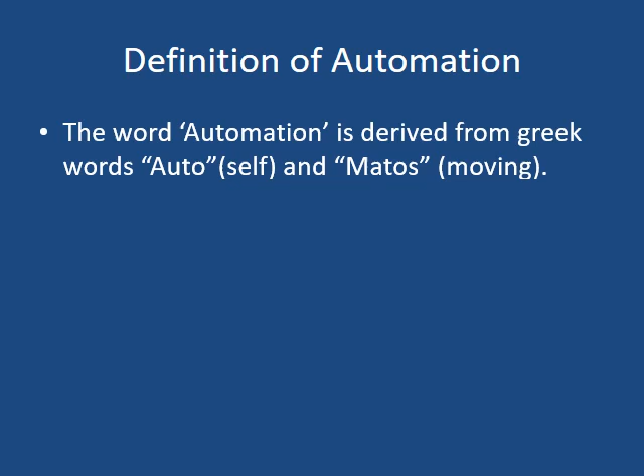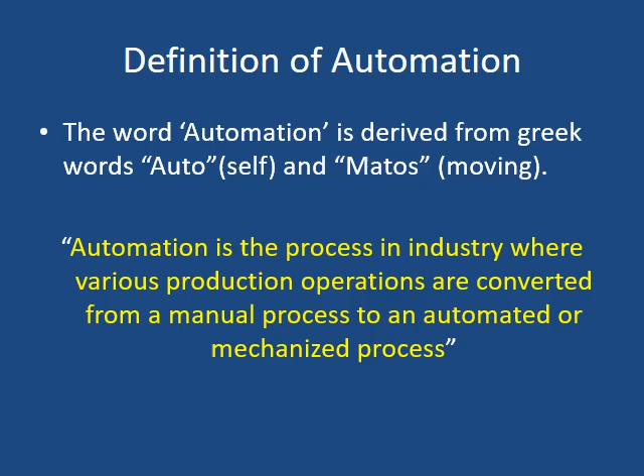So what is automation? The word automation is derived from the Greek word 'auto' meaning self and 'matos' meaning moving. Therefore, automation is a mechanism that moves by itself. The definition of automation is the process in industry where various production operations are converted from a manual process to an automated or mechanized one.

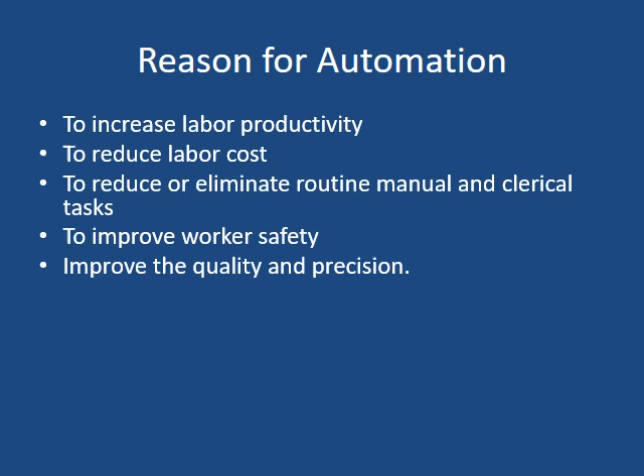Now, why automation? To increase labor productivity, to reduce labor cost, to reduce or eliminate routine manual and clerical tasks, to improve worker safety, improve quality and precision, to do jobs for which human beings will not have the capacity, optimization of investment, higher profitability, and reduced time.

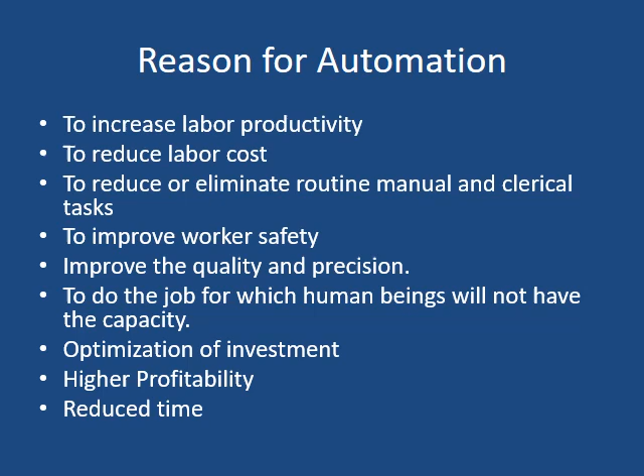Now let us discuss how many types of automation there are. There are four types: fixed automation, programmable automation, flexible automation, and finally integrated automation.

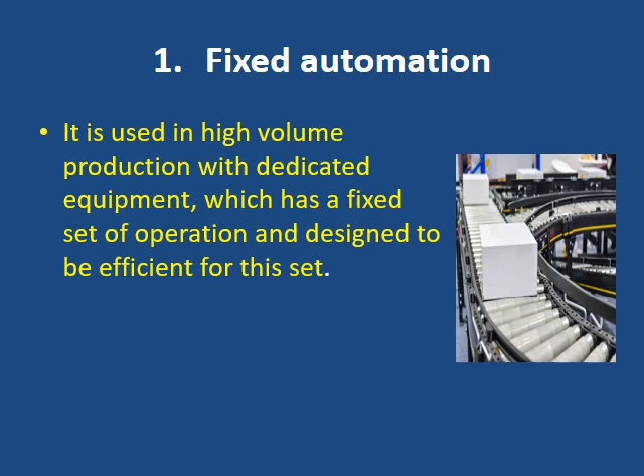The first one, fixed automation, is used in high volume production with dedicated equipment which has a fixed set of operations and is designed to be efficient for this set. Examples include distillation processes, conveyors, paint shops, transfer lines, etc. In the diagram, we can see how a conveyor transfers goods in a fixed automation system.

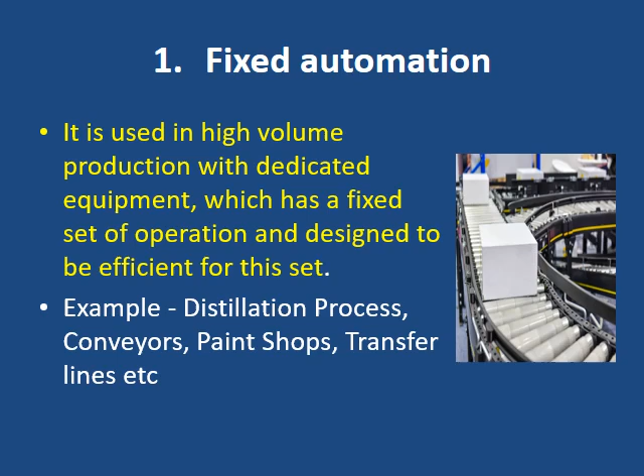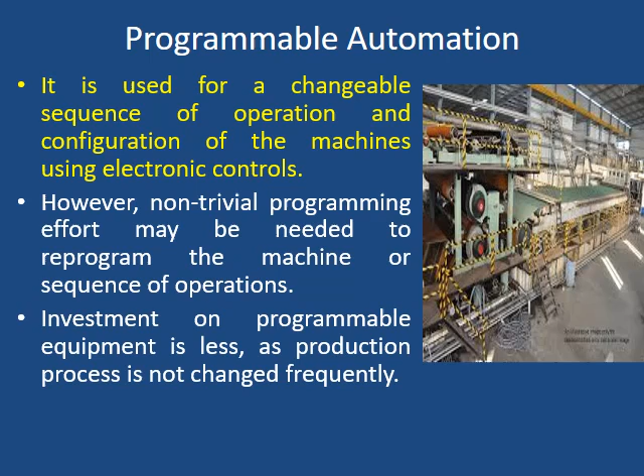Now the second, programmable automation. It is used for a changeable sequence of operation and configuration of machines using electronic controls. However, non-trivial programming effort may be needed to reprogram the machine or sequence of operation. Investment on programmable equipment is less as the production process is not changed frequently. It is used in steel rolling mills and paper mills, etc. In the figure, it shows a paper mill running under programmable automation.

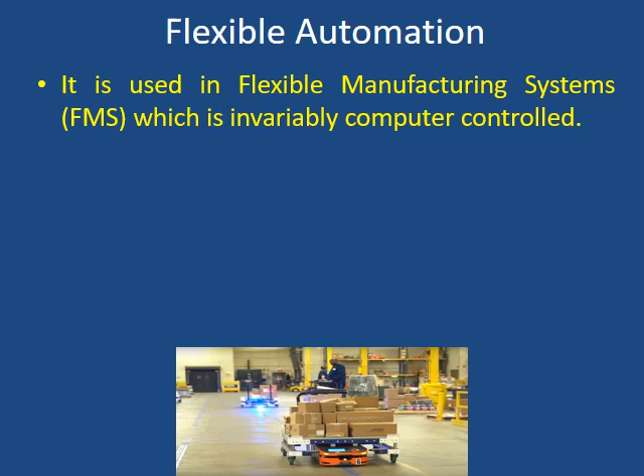The third one, flexible automation, is used in flexible manufacturing systems which are invariably controlled by computer. Human operators give high-level commands in the form of codes entered into the computer, identifying products and their location in the sequence, and lower-level changes are done automatically.

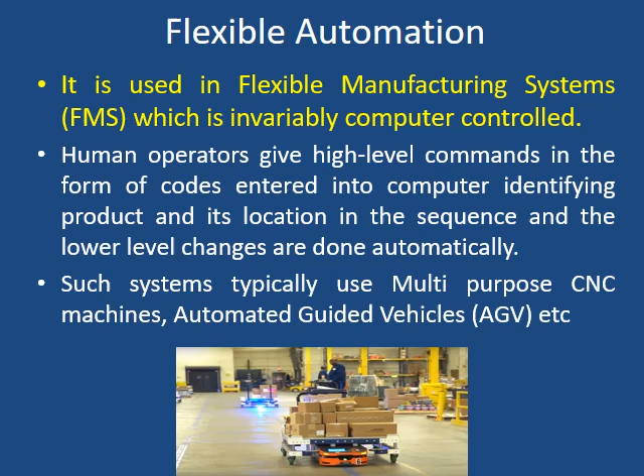Such systems typically use multi-purpose CNC machines, automated guided vehicles, etc. In the figure you can see an automated guided vehicle which is loading goods and transferring them without the help of a human. The next and final one is integrated automation.

It denotes complete automation of a manufacturing plant with all process functioning under computer control and under coordination through digital information processing. It includes technologies such as computer-aided design and manufacturing, computer numerical control and machine tools, flexible machining systems, automated storage and retrieval systems, automated material handling systems such as robots, automated cranes and conveyors, and computerized scheduling and production.

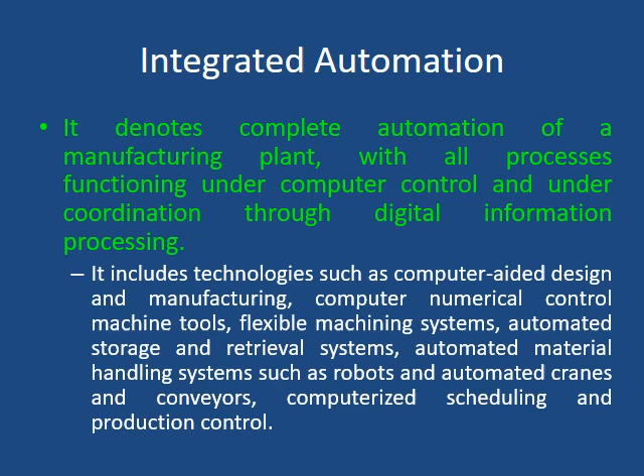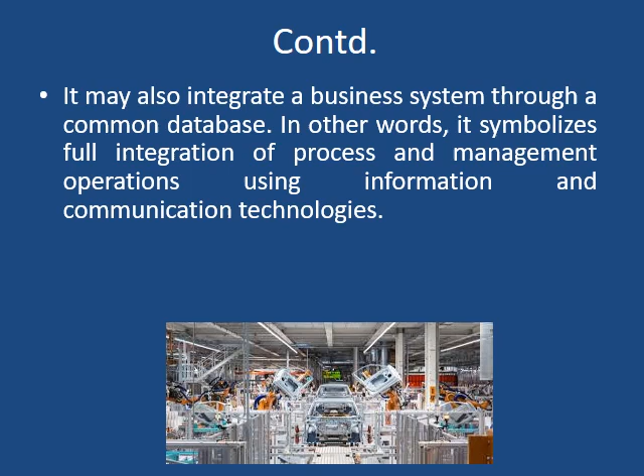It may also integrate a business system through a common database. In other words, it symbolizes full integration of process and management operations using information and communication technologies. Typical examples of such technologies are seen in advanced process automation systems and CIM, computer integrated manufacturing processes. Now, in the figure you can see a complete integrated automated system.

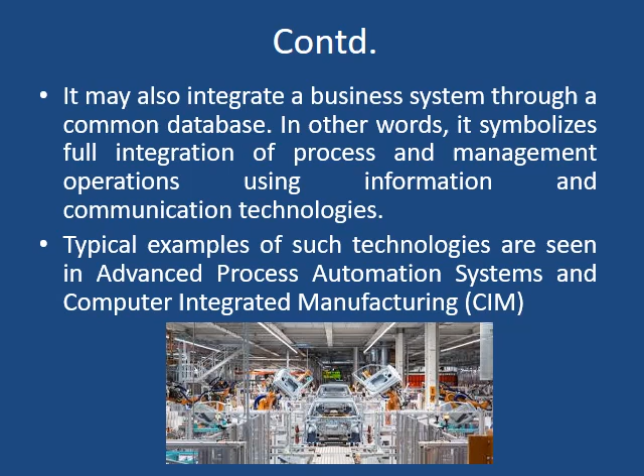So these are the types of industrial automation. Now we can see how robotics are used in industries.

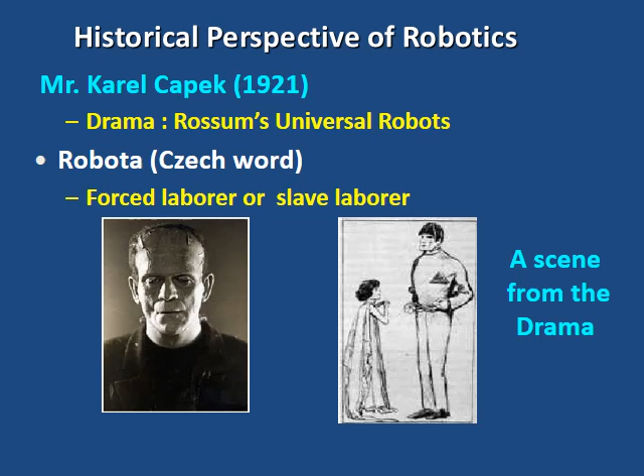The word robot comes from a drama. The word robot was first used in 1921 by Czech playwright Karel Čapek in his play Rossum's Universal Robots. The play involves a factory that builds artificial people to be servants for humans. In this slide, you can see Karel Čapek and a scene from the drama.

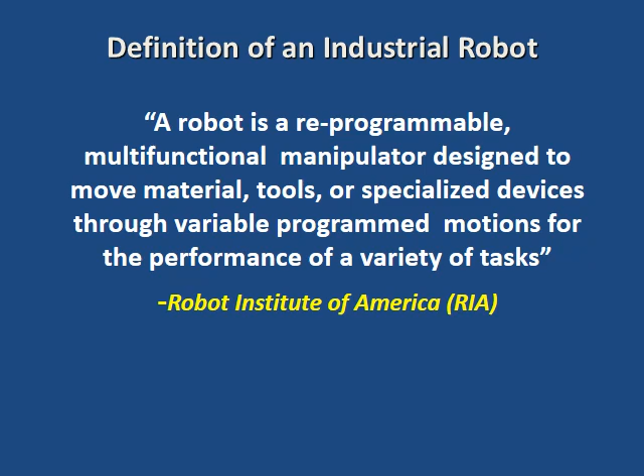Now, what is a robot? A robot is a reprogrammable, multifunctional manipulator designed to move materials, tools, or specialized devices through variable programmed motions for the performance of a variety of tasks.

Now, what are the different laws in robotics? It includes three laws. The first law states that a robot may not injure a human being or, through inaction, allow a human being to come to harm. The second law states that a robot must obey the orders given by human beings, except where such orders would conflict with the first law.

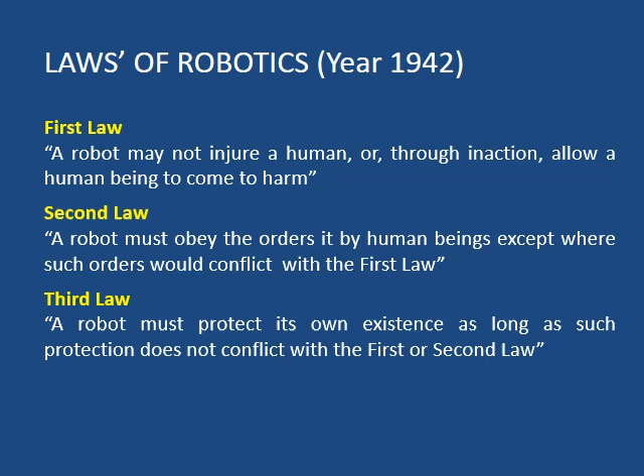The third law states that a robot must protect its own existence as long as such protection does not conflict with the first or second law. And finally the last one, the fourth generation robot.

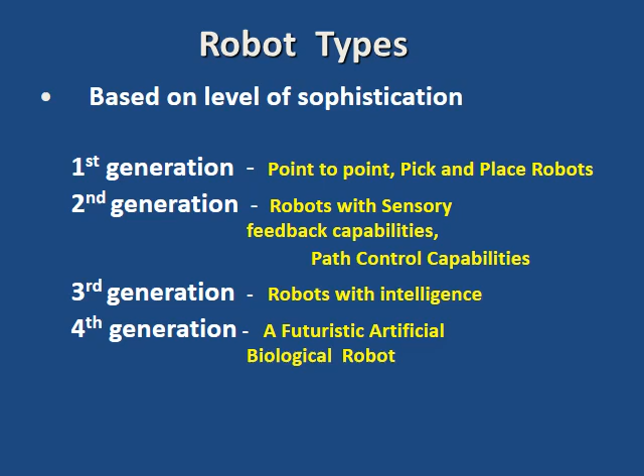It is a futuristic artificial biological robot. It is an interdisciplinary science that combines the fields of biomedical engineering, cybernetics, and robotics to develop new technology that integrates biology with mechanical systems, to develop more efficient communication, alter genetic information, and create machines that imitate biological systems. Now let's discuss the configuration of different robots used in industries.

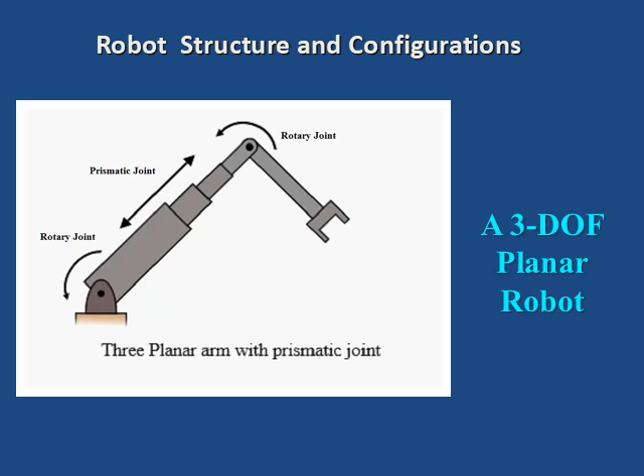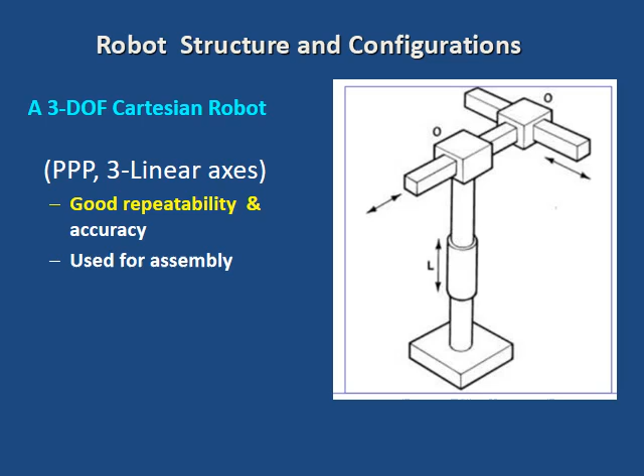Starting with a planar robot, which has 3 degrees of freedom: 2 rotary joints and 1 prismatic joint. The second one is a Cartesian robot, which contains 3 degrees of freedom. It has 3 linear axis movements and also has good repeatability and accuracy, and it is used for assembling.

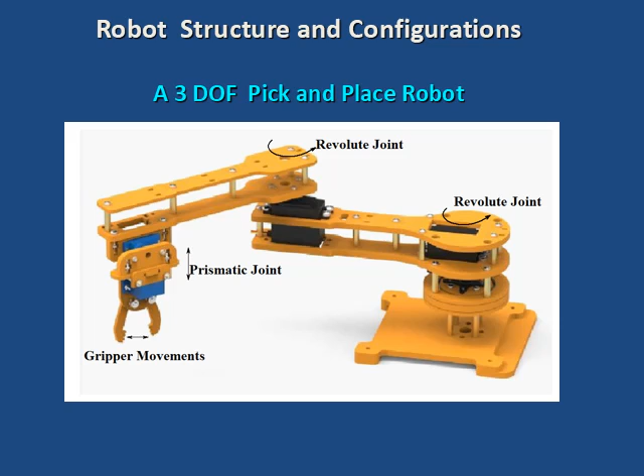In this slide, you can see a 3 degrees of freedom robot which can pick and place things, so it is a pick and place robot. And this is a 3 degrees of freedom spherical robot which has 2 rotary motions and 1 linear axis, and its work envelope is a portion of a sphere.

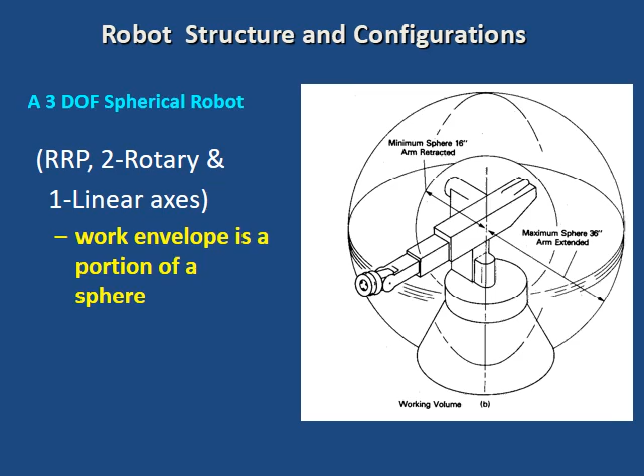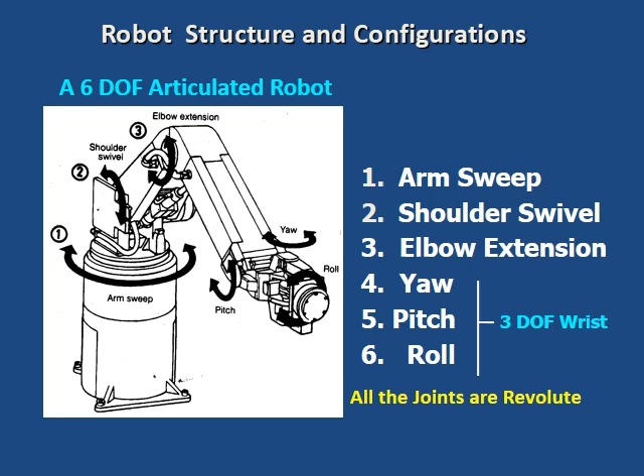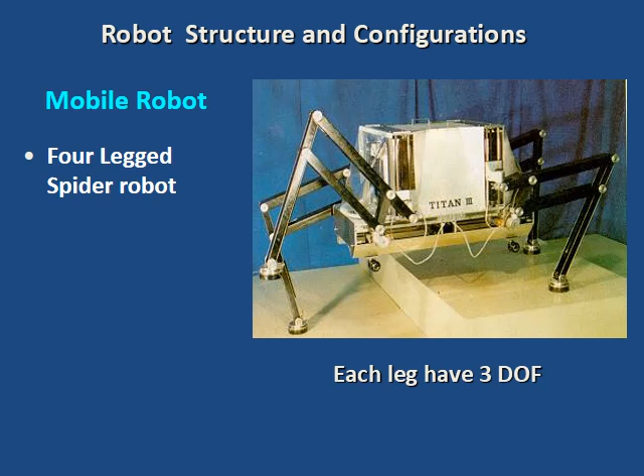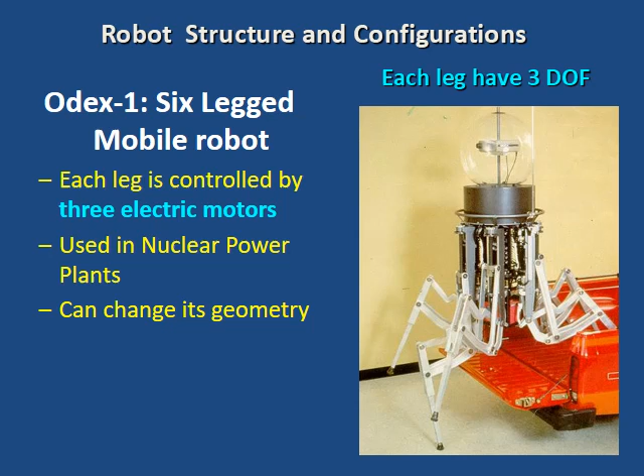Now we can see a mobile robot, a 4-legged spider robot, and this is a 6-legged mobile robot where each leg is controlled by 3 electric motors. It is used in nuclear power plants and can change its geometry.